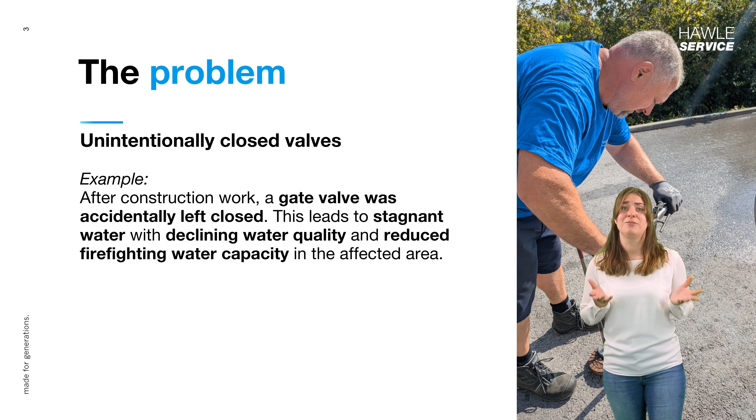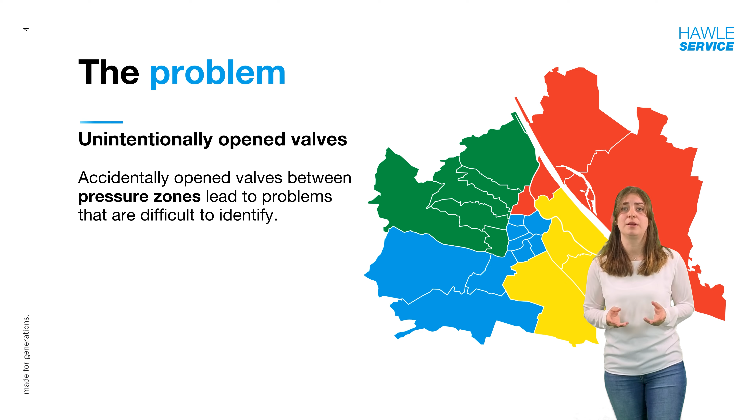What problems do we face in everyday life? An example: after construction work, a valve is accidentally left closed. When this happens, the water stagnates, the water quality deteriorates, and the firefighting capacity in the affected area is strongly reduced. But closed valves are not the only problem. Unintentional opening of the valves between pressure zones also leads to problems that are difficult to identify.

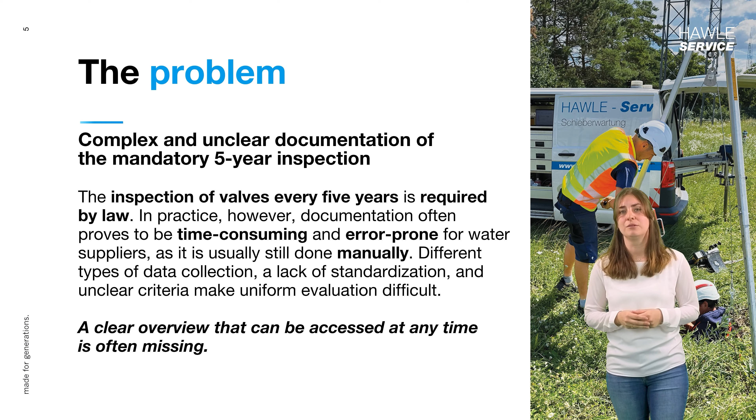Another major issue for water suppliers is the complex and confusing documentation required for the 5-year inspection. The valves must be inspected every 5 years in accordance with legal requirements. In practice, however, this documentation is very time-consuming and high risk for water suppliers, as it's often carried out using analog methods. In addition to this, there are different types of recording, varying standards and unclear criteria, all of which make standardized evaluation difficult. However, a tool with total overview that can be accessed at any time is often missing.

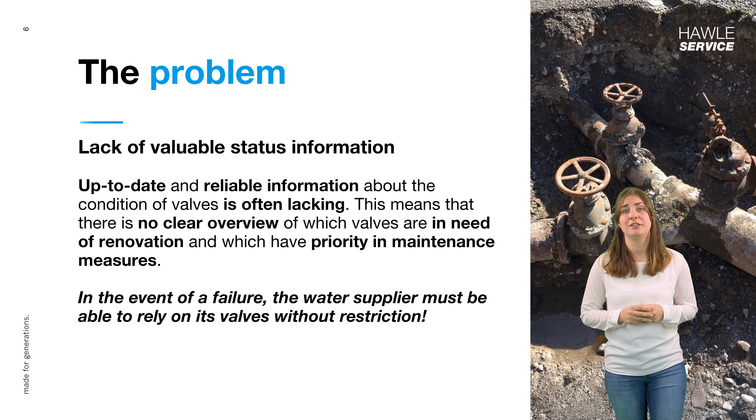Customers also lack information about the status of their valves, since there is a lack of up-to-date and reliable information that provides a picture of the condition of the valves. There is no overview of which valves are in need of renovations and which ones have priority in maintenance measures. But in case of failure, the water supplier must be able to rely on its valves without restriction.

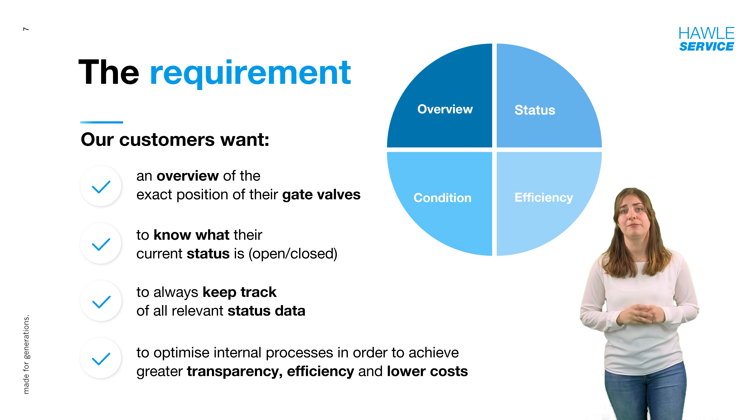So what do our customers want? They want an overview of the exact position of their gate valves. They want to know the current position of their valves. Is it open or is it closed? They want to have an overview of all relevant status data. In addition, they want to optimize internal processes in order to achieve greater transparency, efficiency, and lower cost.

But what is the solution to these problems? The solution is the Hawle.live KEY, our digital valve operating key. The Hawle.live KEY is the digital solution for documenting and monitoring your gate valve infrastructure. Once you have digitized your gate valve network, you have information about the position, status, and condition of the valves at all times. Sensors and electronics are also integrated into the actuation key.

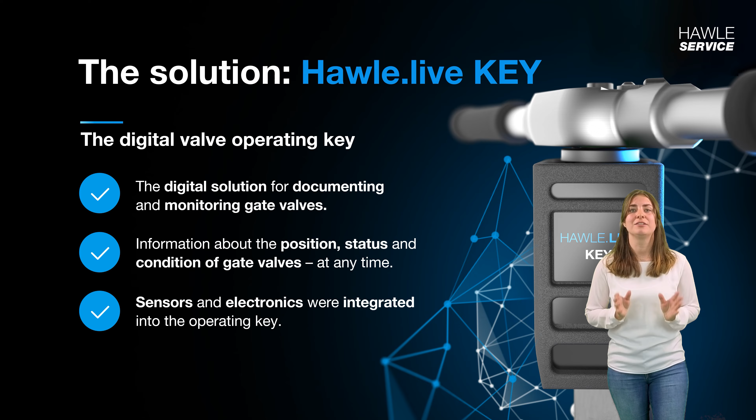What do I need to digitize my gate valve infrastructure? On the one hand, I need the Hawle.live KEY, and on the other hand, the Hawle.live tag. The Hawle.live tag, as you can see here, is essentially a magnetic chip with NFC technology. Unique identification numbers are stored on the Hawle.live tag. This means that each gate valve has a clear identification.

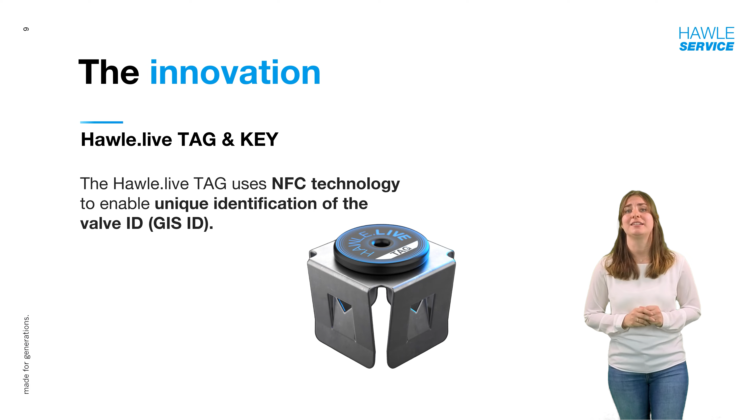The Hawle.live tag is very easy to install. This means that no excavation work is required. The Hawle.live tag is attached to the square end of the gate valve. Each gate valve then has its own individual digital identifier. When working with the Hawle.live KEY and the Hawle.live tag, this NFC technology enables direct data exchange between the two systems. With this data, you can record and clearly identify each gate valve very quickly.

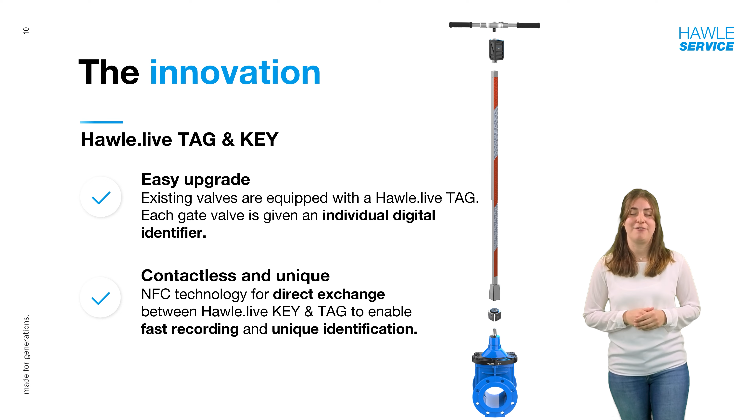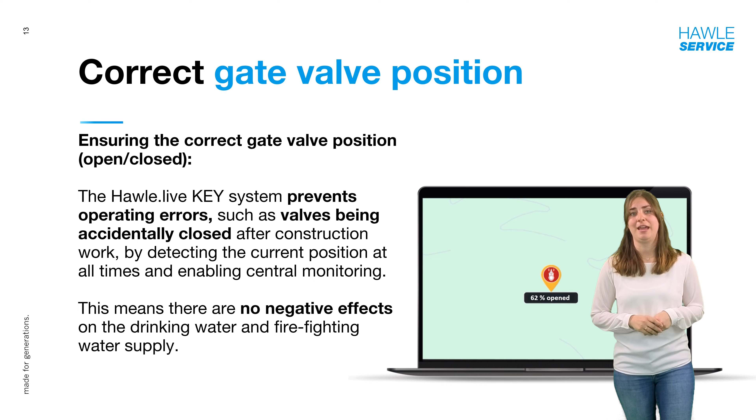So what are the advantages of working with the Hawle.live KEY? I can ensure that my gate valves are always in the correct position, meaning whether they are open or closed. This allows me to prevent operating errors. For example, I accidentally leave a valve closed after construction work or a pipe burst. When I work with the Hawle.live KEY, this cannot happen. Why? Because it always detects the current position, enabling me to centrally monitor my gate valve infrastructure. This means that there are no negative effects on the drinking water and firefighting water supply.

Another huge advantage is that all gate valve operations are automatically documented. This means that regardless of whether I open or close the gate valve, the operation is automatically recorded when I use the Hawle.live KEY. However, it doesn't just record whether I have opened or closed the valve. It also records the health data of the gate valve. This health data is also visualized in the Hawle.live app.

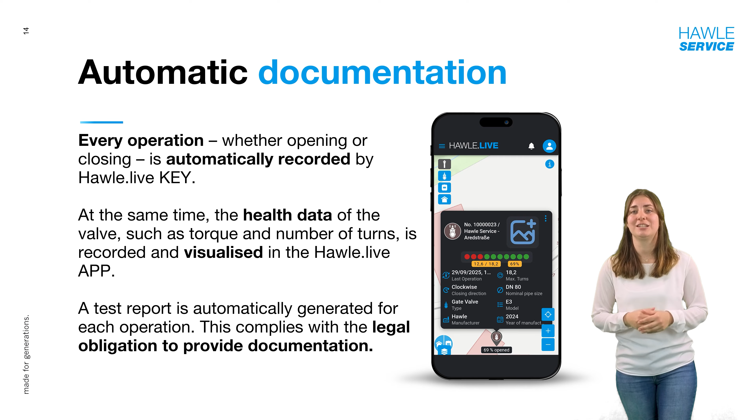For the legal obligation to provide evidence, I have the huge advantage that it generates an automatic test report for each activity, and I can present it if it's necessary. The Hawle.live KEY system helps me to always display the complete status of my gate valve infrastructure. This means that I have recorded all gate valve operations as well as all important status data and can view this data at any time on the Hawle.live app.

This means that I can see at any time whether my valves are working properly or where action may be needed because of gate valves that are difficult to operate. This allows me to plan ahead, ensures maximum safety, and enables me to make decisions very quickly.

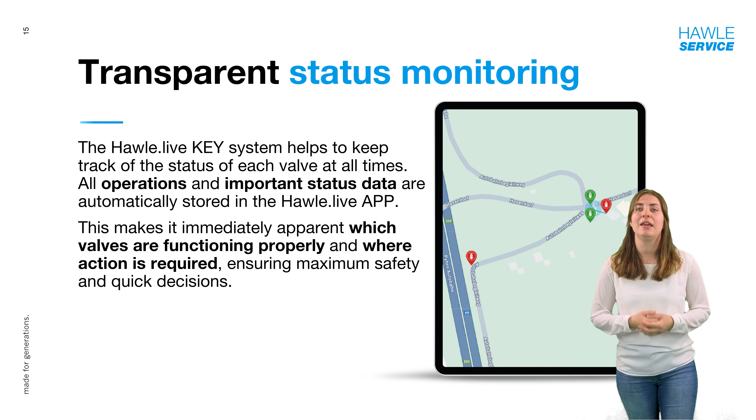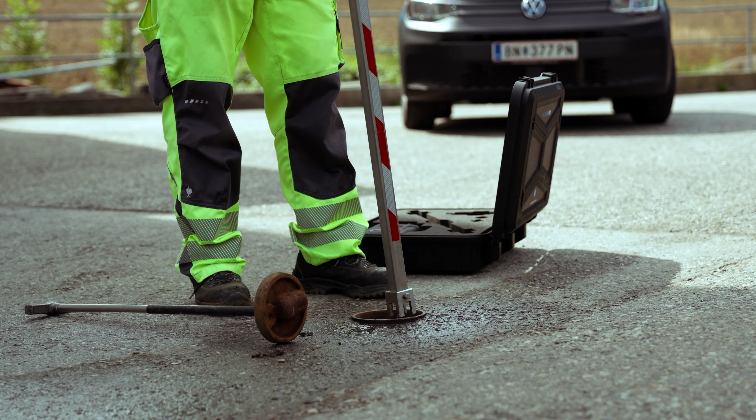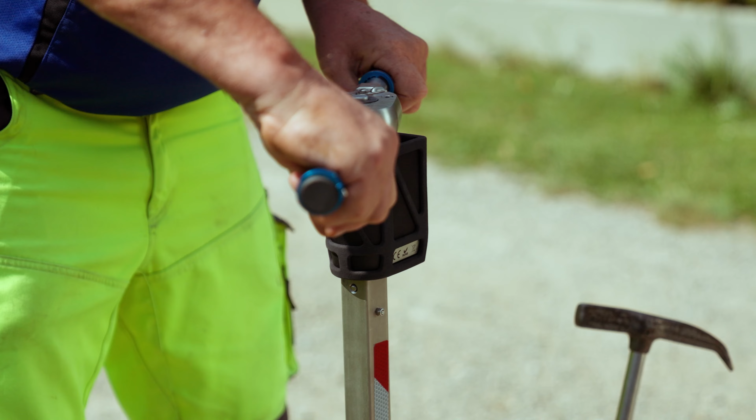Practice shows that working with the Hawle.live KEY is very easy. To operate a gate valve, I first have to equip it with a Hawle.live tag. Then I put the Hawle.live KEY on the gate valve and switch it on. A Bluetooth connection is then automatically established between the Hawle.live KEY and the Hawle.live app on a mobile device such as a smartphone or a tablet. Next, I place my Hawle.live KEY on the gate valve, operate it, and the measured values are then automatically recorded and sent to the Hawle.live app.

If you see a deflection in the torque curve over the spindle revolutions, this would indicate that problems are occurring on this gate valve at a certain spindle revolution. For example, incrustations. Then I can perform a second operation and see the torque curve again. If this peak has smoothed out, I know that I have loosened this gate valve from these incrustations and my gate valve is running smoothly again.

When recording the torque, I record the maximum torque, the minimum torque, and an average torque over the course of the process. In addition, I have a turn time curve diagram that shows me the speed at which I activated my gate valves. How does the Hawle.live KEY work in practice?

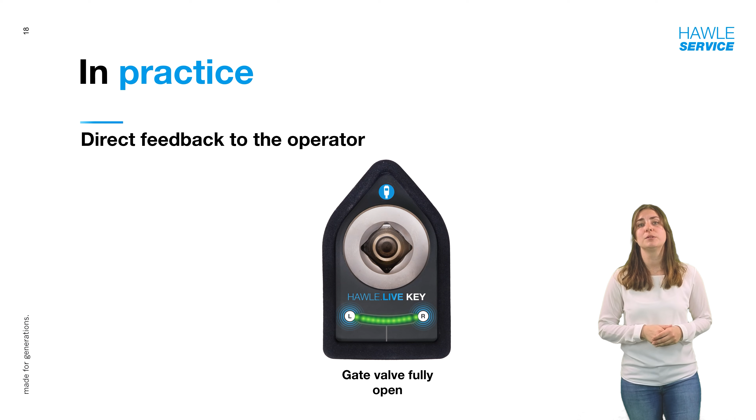If I have an alternating green and red flashing light, this tells me that the gate valve below me is still unknown. This means that I have to operate it fully in order to digitize this gate valve. And if I see a full green LED bar on the key, it means the gate valve is completely open. If it were completely red, it would mean that the gate valve below me is completely closed.

Finally, once again the question, why do I need the Hawle.live KEY? The advantages are obvious. I have all gate valve data, all operating data, all opening and closing data visualized in the Hawle.live app. I can use the Hawle.live KEY on any gate valve model. This means I am not dependent on any particular manufacturer. Installing the Hawle.live tag requires minimal effort and only takes a few minutes.

I can also integrate the generated data into an existing control system. This means that we offer an interface where we can exchange this data. Data safety is very important to us. This means that we have secure data exchange thanks to state-of-the-art standards. Another huge advantage for the user is the easy operation and user-friendly interface.